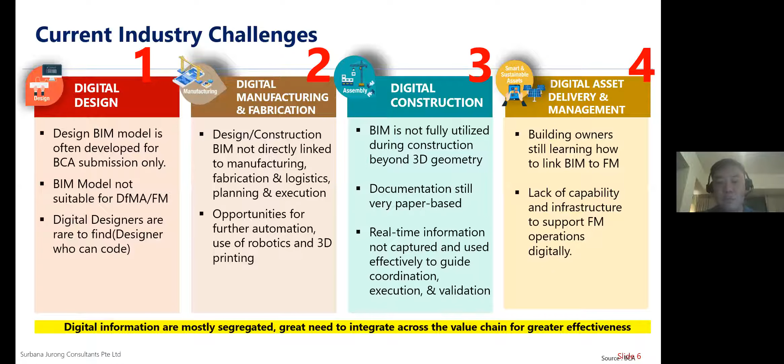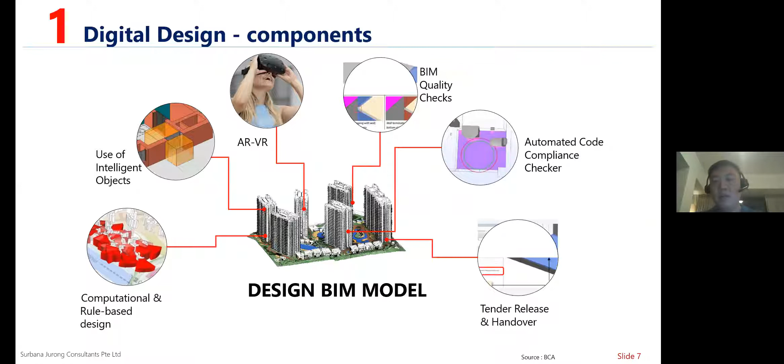So very quickly, for people outside Singapore, there are 4 stages. The first is digital design, whereby we use computational tools. I have some examples to show you: object libraries, augmented and virtual reality, quality checks, and so on. So that's all digital.

The second is digital manufacturing and fabrication, called DFMA, or Design for Manufacturing and Assembly. This is where from the design stage, you can bring your designs through CAM, computer-aided manufacturing, and come out with your product, whether structural steel, PPVC, or precast bathroom units.

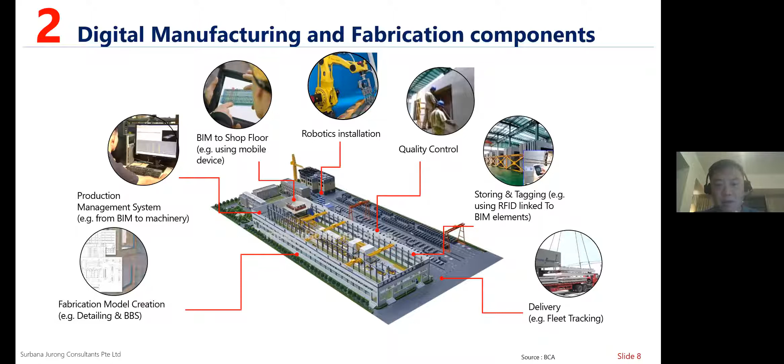And even up to recently, they are looking at prefab kitchen units. I believe the Chinese have gotten this to an art, and I've seen them build hotels and factories. We take years, they take weeks. You can actually go on YouTube and have a look at it. It's not only sturdy design, but fast in construction.

The third one, which contractors will be very interested in, is looking at how they can improve productivity on site. Later I'll show you some examples of time-lapse cameras. Even as a QS, I'm very interested in productivity. I'm very interested to find out how fast can we build.

Are we designing correctly for the builders? Because one of the first things is, to have a precast building, you can't design it cast-in-situ and then say you want it precast now. It doesn't work that way. You must make sure when you design your building, it's designed for constructability and buildability in mind. Now there's a difference between the two.

So digital construction is important, and it looks at using trackers like RFID. In some of my projects, I'm using QR codes, and simply by using a camera like a handphone, I'll be able to use the QR code to get information and even do payment. So that's the third part.

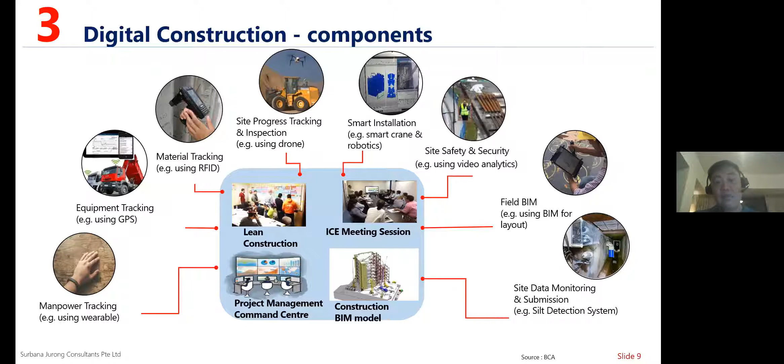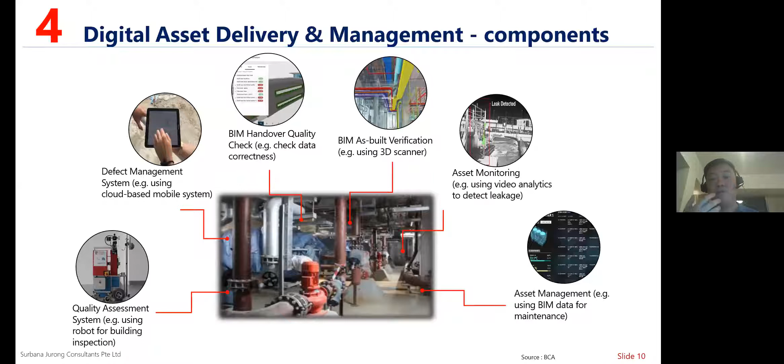The fourth part is on digital asset management. This is where you can do FM, facilities management, taking the BIM model, extracting it so it's information-rich but data-light—not a heavy model—and you'll be able to do facilities management using this BIM model. I have some examples to show you as well.

So during this COVID-19 period, we are all very familiar now with these e-meetings, and I conducted a seminar last week with about 700 people involved. These e-meetings are great, but I must say nothing beats face-to-face, meeting a person and shaking hands, because human beings are built to be social animals, to meet each other and shake hands and so on.

E-meetings are here to stay, and this is going to be the norm. I'm happy we are having these e-meetings now, because every time I want to travel to meet my client, or for project meetings, I speak probably only 20 minutes out of 2 hours, but spend half an hour to 45 minutes traveling, almost 2 hours on the road. So now with e-meetings, everything is much faster.

Later, I'm going to show you an example of how, like in the show Ready Player One, I've worked with an SME, a small medium enterprise, and we have managed to create that. But that is for later.

A lot of training is now online as well, and this is an example of how we have conducted our BIM training. We have 5D training, which means cost management training. We have training on how to do design, and so on. So instead of face-to-face training, we are doing training on the platforms, and that's how we keep ourselves upgraded.

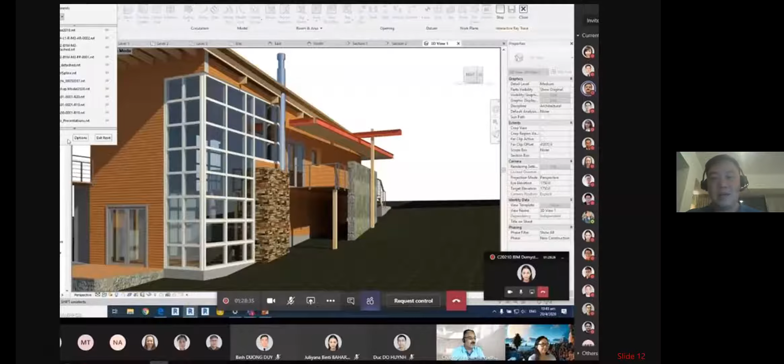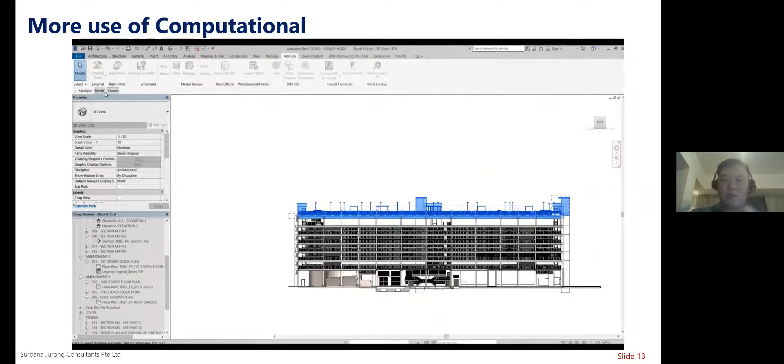I noticed that during the period of COVID, clients, or rather my internal clients, meaning our designers, for example in Surbana Jurong, are asking me, I can't have many of my modelers now to do certain things, can you help me automate certain processes?

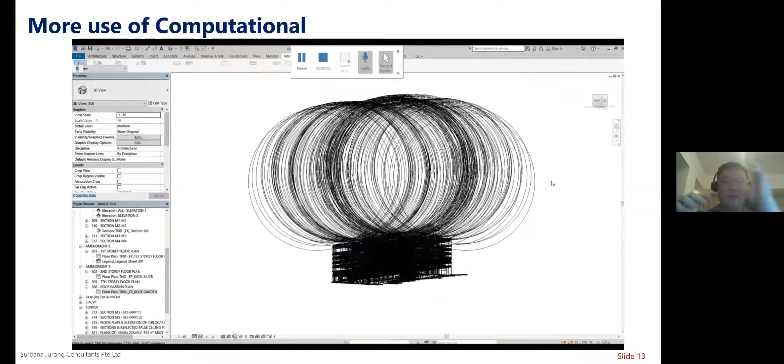This is an example of how you can do lightning protection. The traditional way is you use a 45-degree angle or a rolling sphere, and you need to physically draw the rolling spheres on all the metallic parts to see how the building is protected. Very troublesome, very cumbersome. This software is actually Revit, but we wrote a code on top of that to transfer all these rolling spheres.

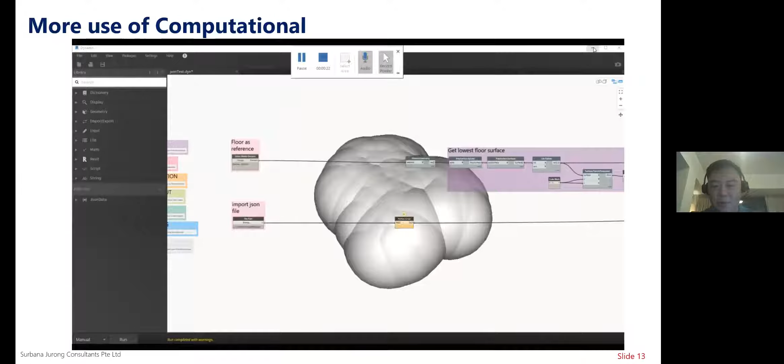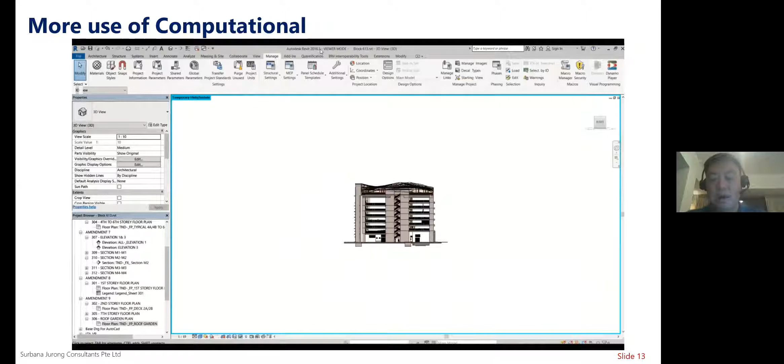We wrote a script in Dynamo, so Dynamo and Revit come together, telling the computer: whenever you see anything metal, draw a sphere on top of it. The computer will blow this up, and then we ask it to clean up all the overlaps. And voila, what would have taken days or weeks has been done in a matter of minutes or an hour. This shows how, for example, this building or car park will be protected by the rolling sphere and lightning arresters very quickly.

So I'm seeing that especially in this period, people are asking for this type of computational BIM. And I'm also seeing that in the future, quantity surveyors or cost engineers will need to know this language, C++ or Java, depending on whether it's Bentley or Revit. This means as quantity surveyors, we will be able to get an abstract of the .rvt file from the client. Of course there are IP issues, but I'm sure in a couple of years all these will be ironed out, and we will be able to interrogate the data and get all the information out.

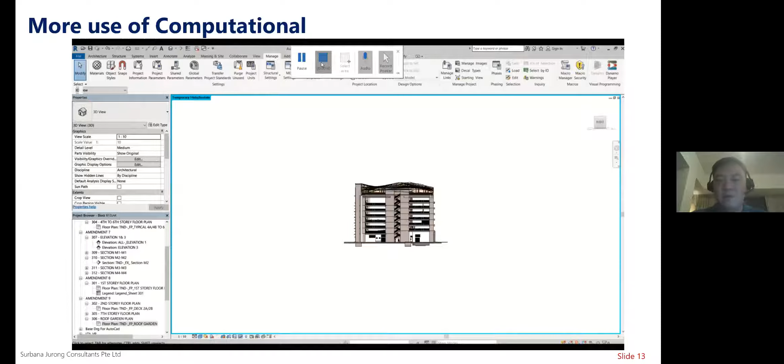So that as quantity surveyors, even when designers don't model in the finishes, we will be able to get this using controlled quantities. I foresee that in not 10 years, but maybe less than 5 years, we will be evolving to do this.

There's also part of the QS and cost engineer roles where they're doing facilities management, which means I have to go to site and check certain equipment. Right now I'm showing you this sensing.

We are using sensing, whereby we have Internet of Things, sensors that are placed in buildings and machines. So you can see thermal, visual, air quality, and you'll be able to know how things are, whether it's good or bad, and sense it remotely.

This is something somewhere in my cave, we have a cave in the office, and I'll be able to have a look at it. Right now it's on when the guys are not there, it's on power-low mode, there's only 200 lux. This is one of those things I see that in the future, FM quantity surveyors and cost engineers will be looking at.

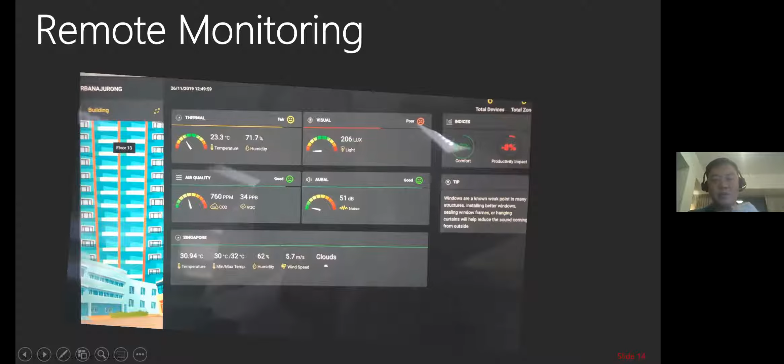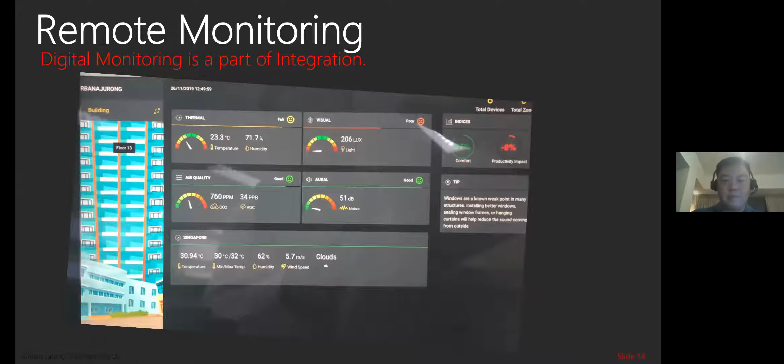So digital monitoring is definitely part of the integration. This is one of my favorite drones.

I also see that for QSs, especially site QSs, contractors, developers, or even consultants, everyone will be a drone pilot. I'm taking my test now for drones, and it's quite interesting because Singapore is upgrading their drone license syllabus. It's quite refreshing to go back to school again, but to play with drones. You need great dexterity, so that the left thumb controls up and down, right thumb is left and right, and you must use both thumbs with enough dexterity to control this drone.

So I'm going to show you some pictures of how we have used it. This is just an example of the drones that we use, a DJI. Instead of walking a site that's 2 football fields, this little fella can cover the information to gather data very fast. We can program it to go a certain distance at a certain speed, and it will travel to take the information.

I was with the senior drone specialist in my team, Kenneth, and he turned his hobby into a passion for what he likes. Right now he's doing some confidential projects, using drones to supervise projects. I believe this is going to be part of the way we work, because taking the image, drones are just tools, but putting it into software for photogrammetry, or for spectral analysis, you'll be able to gather a lot of things.

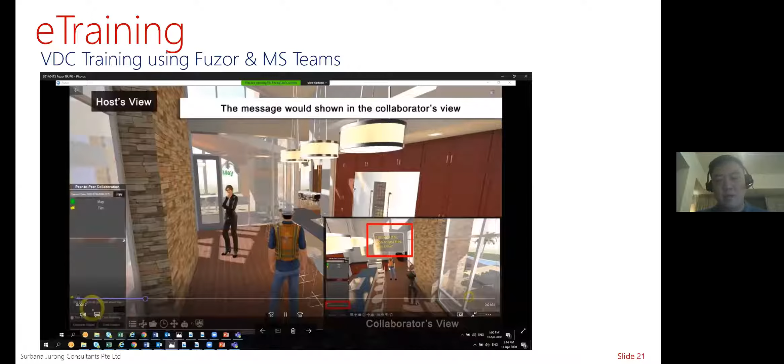So this is just an example of how we get our guys ready for virtual reality, and using Fuzor to see how sequencing actually works. So we know how to do estimates. If not, we'll just do dollar per meter square or just give allowance here and there. It doesn't work that way.

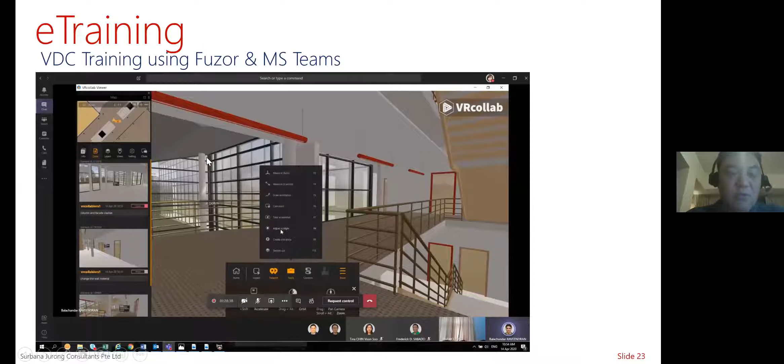So we can do VDC, which stands for virtual design and construction training online, and also coordination online as well. As QSs, we'll be able to see this, click this and do measurements as well, all within the virtual reality itself. I foresee that in the future we will be looking at design, and this is just an example of how we teach Python and C++ as well, on how we can interrogate the BIM model to get more information, materials inside.

As you can see, it's quite a handful, and I believe when universities start to embrace this, this will be a very powerful tool. Now engineers and architects are already doing this. If as a profession we don't move towards this, I think we are really going to be left behind.

So there must be also support. So even as a company, we subscribe to things like Glodon, Cubicost, Autodesk, so that we can always get ourselves updated by the latest that they have. Traditional QS firms may not do that, or cost engineer firms may not do that. But the more forthcoming ones will see design first and then bring it back to how cost management works.

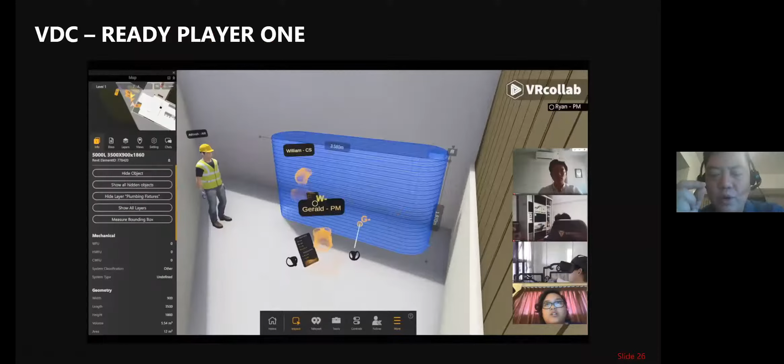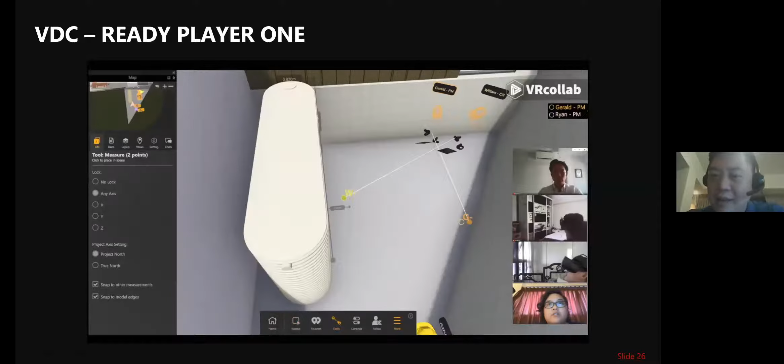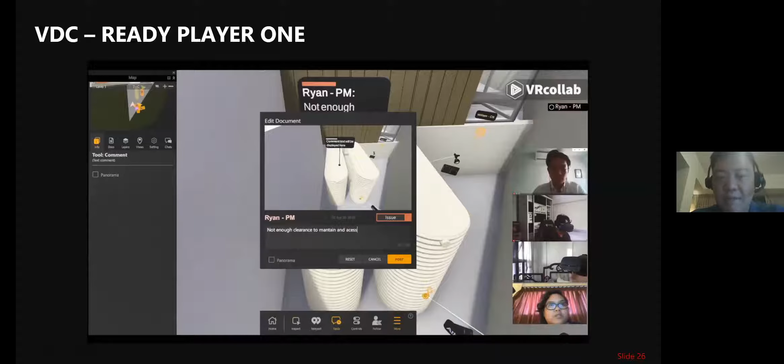And because of that, this is an example of Ready Player One, whereby you have people trying to do coordination, but they're all in different places, as you can see on the right hand side. Some will have goggles, some no, and they are actually sitting down doing coordination. These orange things are all avatars, okay? They're actually sitting down doing coordination, doing measurements, as you can see. There's some units and annotations here, and they are trying to see how they can coordinate putting in the vents. They're saying there's not enough clearance, look, I need to have more clearance here, can you move it?

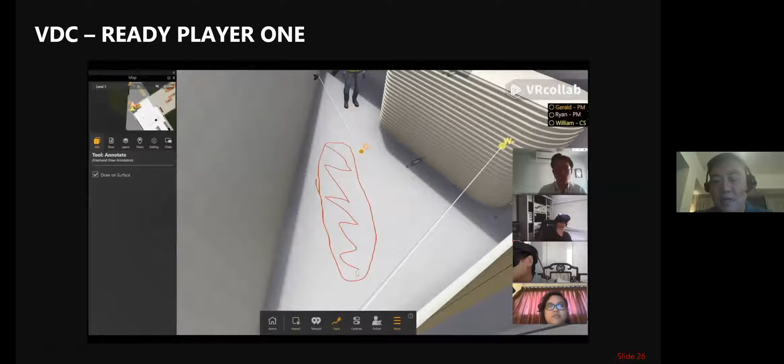And all this is in the virtual environment even before we get into construction. They can do annotation, they can draw, they can talk to each other, and it's really quite unique. This is something which I feel is the future.

But why I'm showing this now is we are piloting it out, because not many will want to be designing in this type of environment. The young ones, yes, I'm working with some Spanish architects in Hong Kong. This is part of life. Every desk will have one goggle, and I foresee that in a couple of years' time, not even 10 years or 5 years, maybe 2-3 years' time, we will be moving to this. It will be everywhere, right?

And again, in our profession, we need to start moving to this. So what we did in order to, as a QS, be able to anticipate this, this is a flow, an experience map. How, as a QS, I would take a 5D model, work with the design for scheduling, because faster means perhaps more cost, and work together with the contractor to come out with the costs.

I did a visioning exercise to even say by 2040, it'll be a situation that contractor will be part of as a consultant in the developer team, because we need their understanding of how we can build better, faster, cheaper, and not just work in silos where the design consultants think they know best.

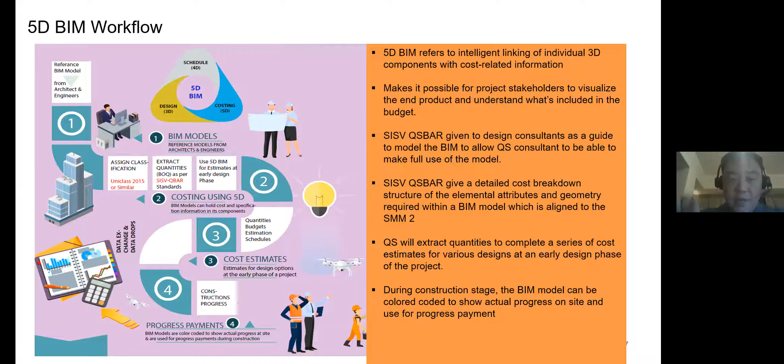I know, guys, you don't have time. You won't be able to draw a lot of things, but please make sure you define your BIM model, your room as a room, for example. Second, please define your floor slabs so that we will be able to measure. But in the event they don't do it, we can use softwares like Cubicost to click and do our measurement.

So some of the softwares like Cubicost has SMM2, NRM, Construction Electronic Measurement Standards, and SMM7. Supports BIM models, especially the .rvt. I think they're also looking at ArchiCAD, if not wrong. Deals with variations very quickly. And the most important is, they'll be able to suck in the BIM model so that as quantity surveyors, cost engineers, we'll be able to work on them.

Okay, and we can generate high-level quantities or even detailed quantities. Now, the trick is that in order to get detailed quantities, the BIM model must be there, must be of good information quality and BIM quality as well. But in the event it's not, you must have a middleware that can help you to extract the quantities as well. So that's where, what we are using is called Cubicost.

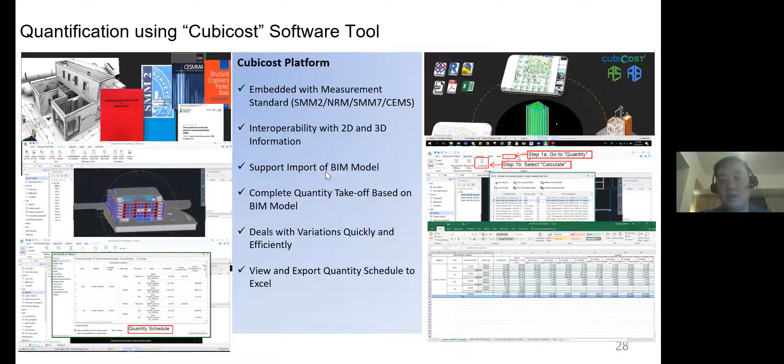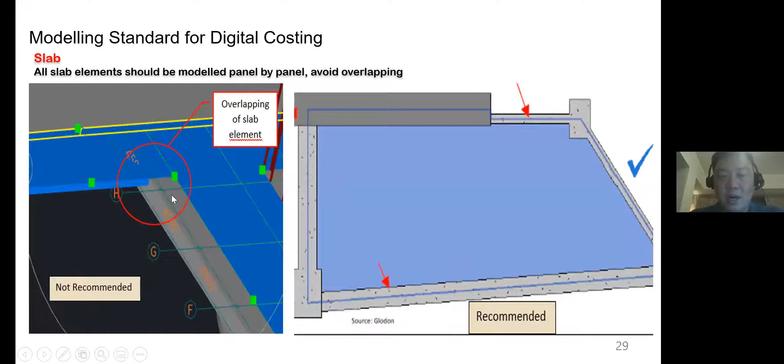So these are examples of whereby the BIM model has to be done properly. If it's not, then you're going to get very, very odd information. This is an example whereby once you get all the information in properly, you will be able to run simulations and get the costing quite fast.

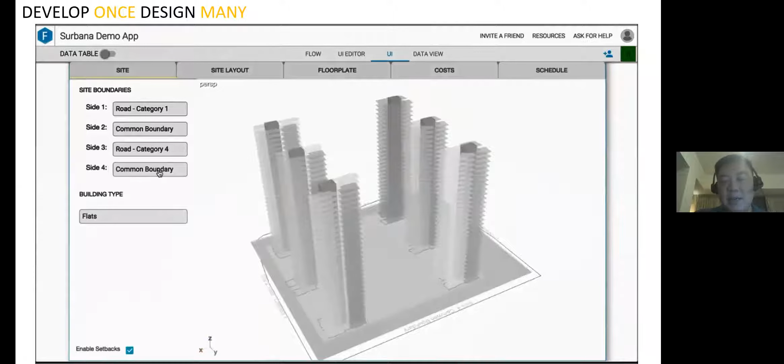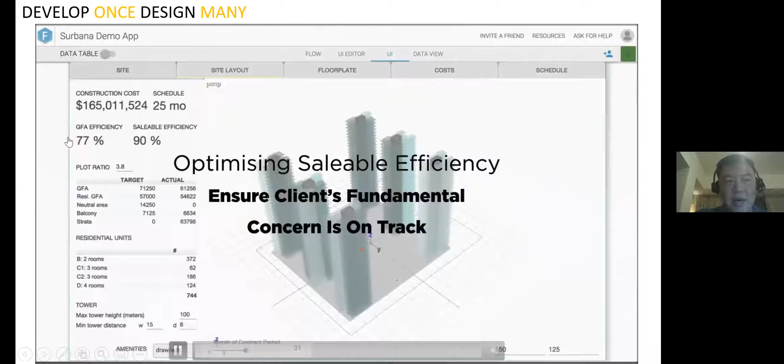So this is using C++. As you can see, schedule months, different blocks. You have a typical construction cost here. But once you change, this program is self-responsive by floor plate, for example. When you change it, you can see the months will change and the cost will also change so that we can find the optimized cost and time.

I would like to also introduce everyone to this thing called the ISO 19650. This ISO 19650 is an extracted version from the public available standards in the UK, the PAS 1192. So far 19650 has only 2 parts, but altogether there will actually be 5 parts. But this is an important part because it is how you have standardization in processes, physical process and digital process. And I feel very strongly as a profession, we must go into this.

That's the reason why I've gone in as the vice chair for Building Smart Singapore, and trying to push to say that, you know what, the industry has to go into some standard, IFC, ISO, but my reason is also I want to make sure the QS fraternity will be able to embrace this, because again, if we don't, we'll be left behind.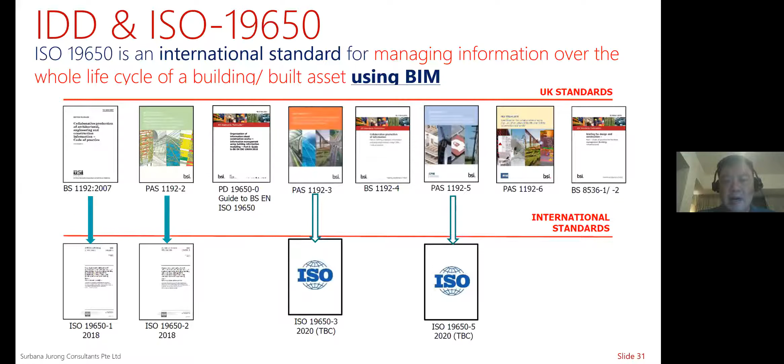We won't know how to operate a BIM model or common data environment tools, whether it's Project Wise. I have some examples later. So it's very important that we must be able to understand this, and so in October last year, we made a decision. I told my team, let's go for it, let's get ourselves certified. I gave ourselves 3 months till January. So in October we made the decision, and by November, December, January, we managed to get the certification in.

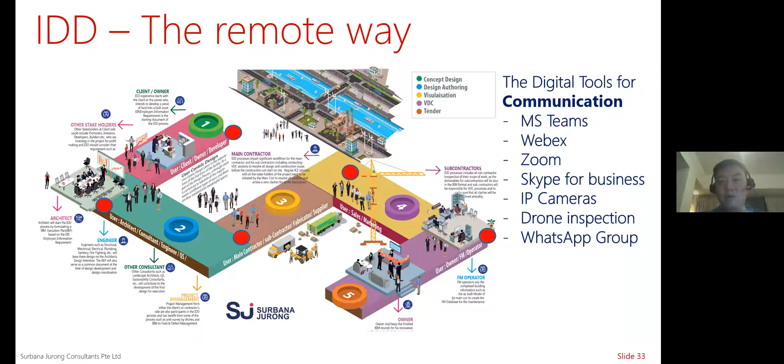And this is whereby we started to plot. Again, as a QS, I'm driven by details. I'm driven to say what the client is doing, what the contractor is doing, what the contractor's subcon is actually doing, and so on and so forth. So we started to draw this information. This is only a tip of the iceberg, there's a lot more information to come across. And we started to look at this thing called an experiential map, an experiential journey - what the main con would be looking at, the architect, and so on. So we started to draw this because I have one for the QS, one for the architect, one for the engineer, and when all these come together, we will know how it all comes together.

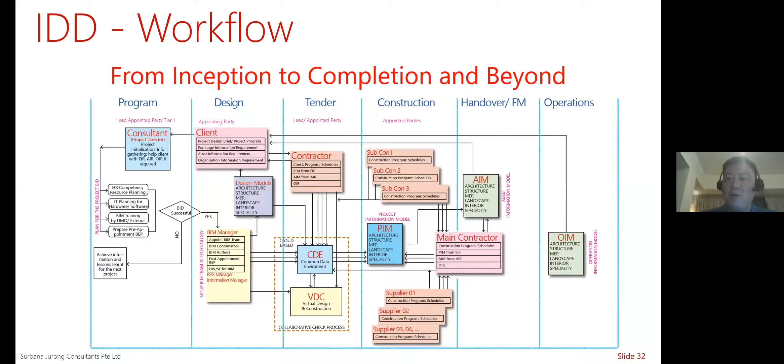Again, as a QS, my father was the one that brought ISO 9001 into Singapore. I was learning from him how he did it. And it taught me to say, how can I bring this - but this is digital - an ISO 9000 for digital into the office. I think we are the first to be certified in Asia for this as a Singapore company, so I have this under my name card. I have the BSI fundamental for this, Euro standard, British standard, ISO 19650 qualified, and I have to renew this every 2 years. But this is going to be very powerful.

We can use this in our submissions and our understanding. Right now I'm submitting this to, even contractors are my clients as well now, and I'm showing them that this is actually needed, because you need to have this process to be able to design properly as a contractor. Then you can do 4D for scheduling, sequencing, safety, and then costing.

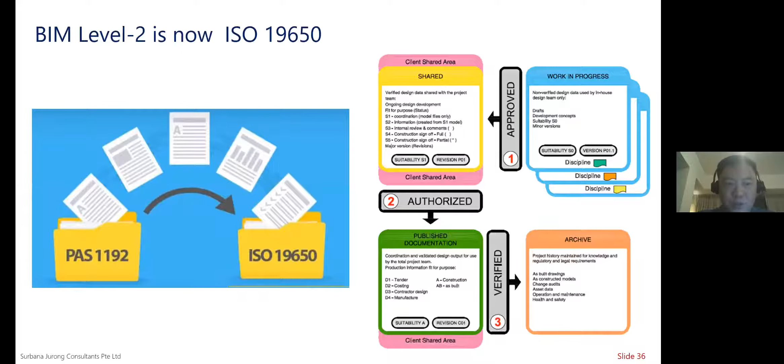Last few slides is on common data environment, whereby we'll be able to look at how, as quantity surveyors, we must work in this collaborative environment. This is a norm, whether it's Project Wise, or I have some examples to show you. This is also a requirement of BIM level 2, or part of ISO 19650 part 2. And there are strategies that we need to look at - manuals, capabilities, and so on and so forth.

And these are some of the examples that we have to use. BIM 360 is one, for collaboration, that's more from Autodesk. BIM Cloud is from Graphisoft, and I work with Graphisoft with ArchiCAD. Project Wise, Open Building from Bentley. Each of them will have their own benefits, and all these are deemed as common data environment. I feel that even in our profession, we must know this, we must know the process. If not, we'll be left out again.

Remember I mentioned about knowledge and scripting? Singapore is looking at this thing called a model checker, which means you'll be able to check compliance - running distance, gross floor area, and so on. But this also means we will know how to take off the quantities, because they want to check the balcony areas, which is 10% of the gross floor area. This will be something maybe 10 years from now - Singapore will be ready in 2025. But I see that in 10, 15 years, it will be in many countries. I understand Russia is also looking into this. So this is an automated checker for code compliance.

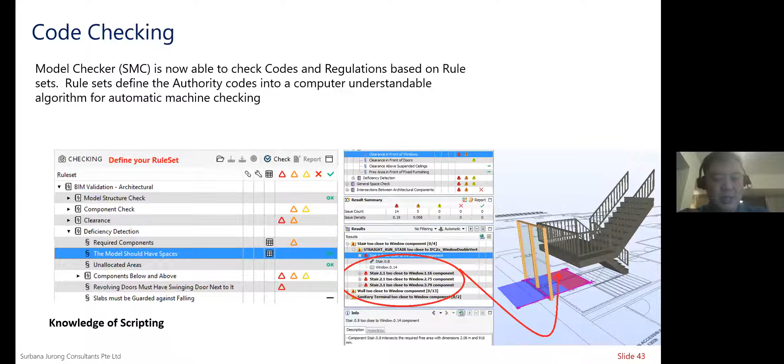Last point I want to mention is on digital twin. For facility managers, cost managers - FM cost managers - they will be looking at operating a digital twin, whereby you have a mirror of the actual building in virtual reality, and you'll be able to look at this with all these consoles around you.

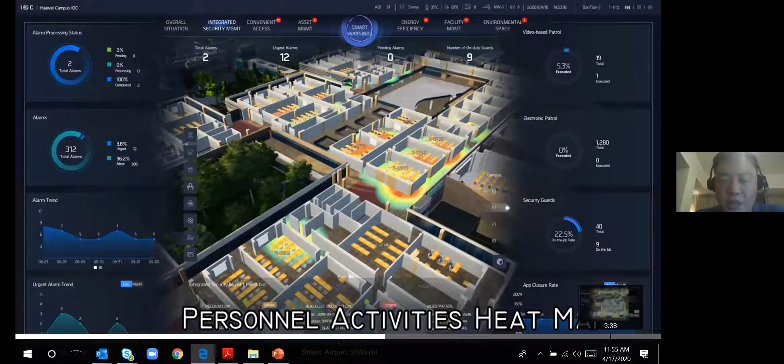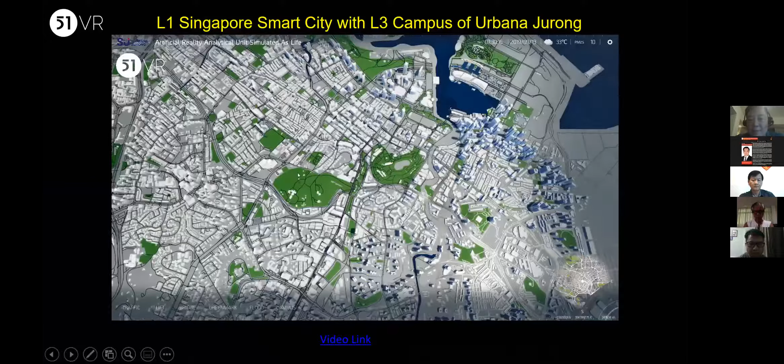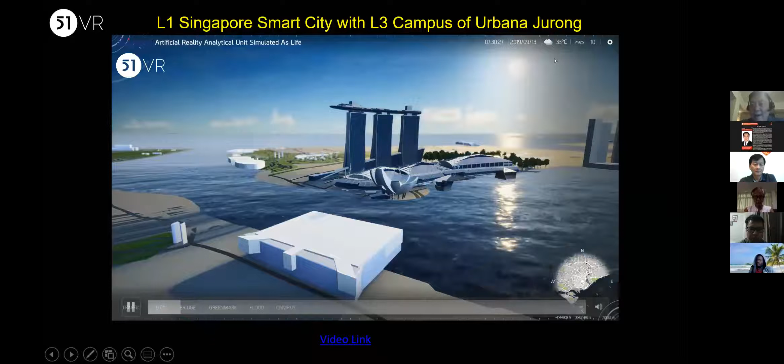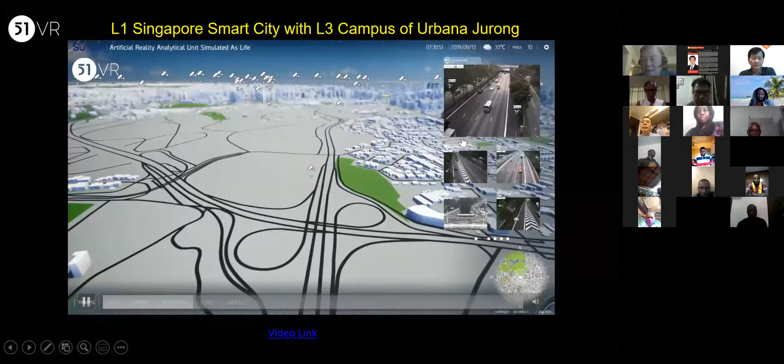And we are doing some for local clients, and also for overseas projects in China and Indonesia. But the whole idea is to be able to map cities, to map buildings, and you'll be able to see things like weather differences, whether it's going to rain. You will know the energy efficiency of these buildings. You'll be able to look at traffic cams, get important details out, and manage that. If you see there's an accident, you'll be able to ask for help. These are on lift data, so people who are stuck in a lift, for example, passenger trapped.

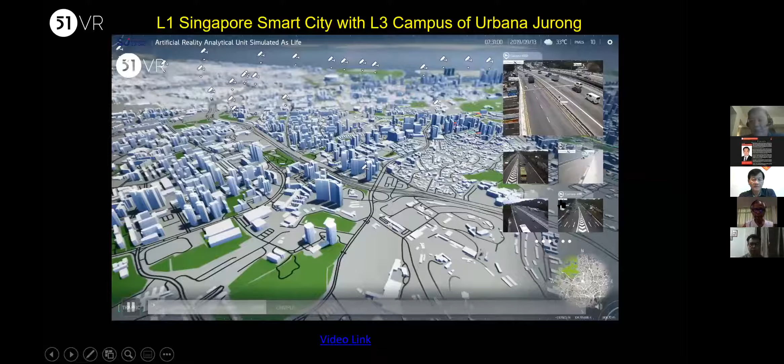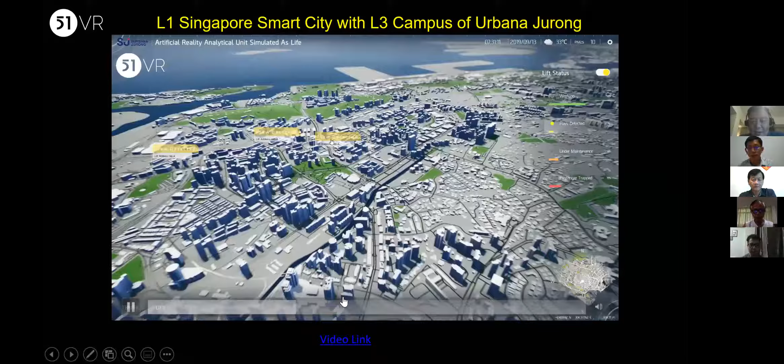This is all, by the way, everybody is safe, this is just fake data. So this is an example of how digital twins will work. You'll be able to look at asset management as well, monitor aging assets, and cost these type of aging assets, for example, in terms of asset proving.

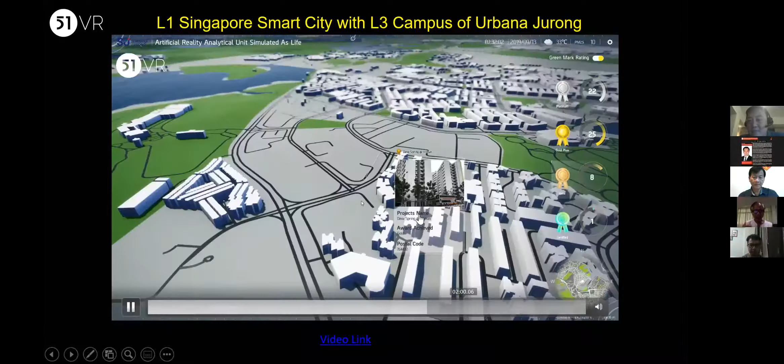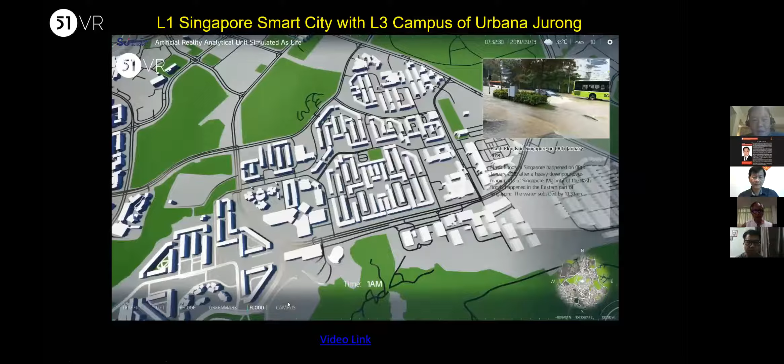So these are just some examples. You'll be able to look at flooding, do flood analysis, and the water guys love this, because they can look at how flood water will be dissipating. You see the time here, right? Especially now with climate change, we just put in a climate change tender, looking at haze in Singapore, water spouts, small little tornadoes. Very interesting, I must say. This is really going to be the future.